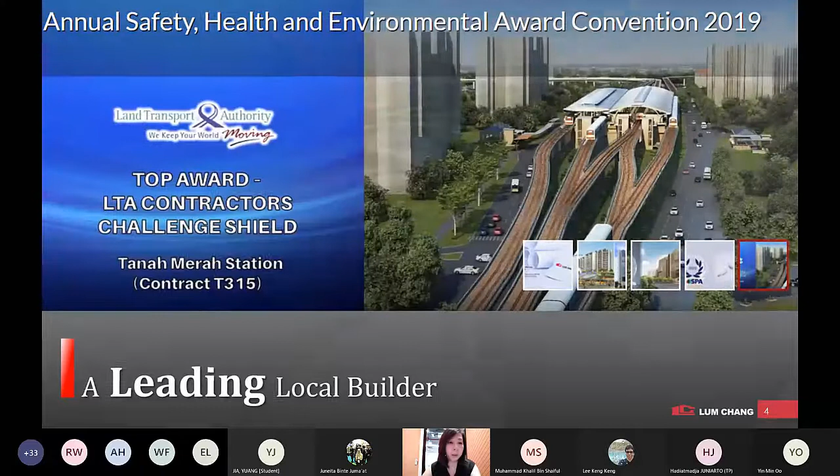So how did Lum Chang transform with the IDD adoption? Besides achieving technological capabilities, we were able to also improve our sustainability, our environmental health and safety, strengthen our competency in building projects, advance our capabilities in complex civil and infrastructure projects, and build capabilities for the workforce of the future.

Virtual Design and Construction, or VDC, is an integrated approach that combines the use of building information modeling, which is BIM, and advanced management methods to simulate the complexity of the construction project delivery.

So the value proposition is to understand the difficulties the project team is likely to encounter, to analyze these difficulties and address them in a virtual world before any of the construction work ever takes place in the real world.

So integrated digital delivery, which is IDD, aims to connect all the project stakeholders through digital information. Such shared information created through BIM VDC will allow the integration of the entire project delivery process from design, fabrication in factories, assembly on site, to operation and maintenance of building.

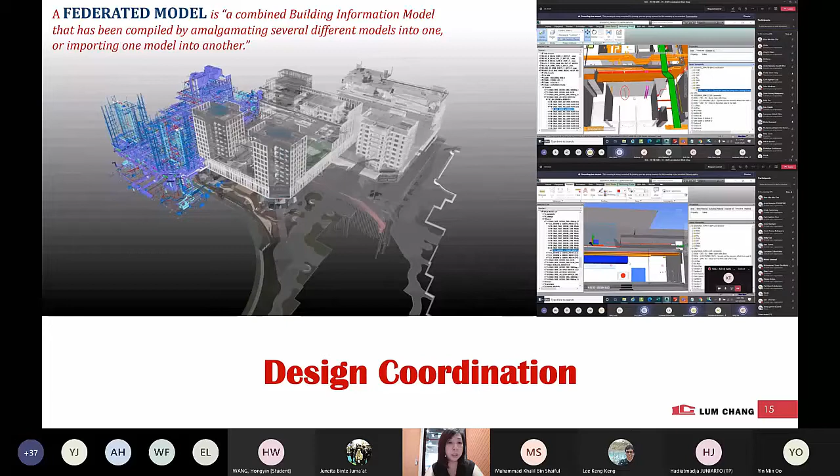In digital design, in cross-phase integration, the design BIM model is usually handed over to or procured by the main contractor upon award of contract for development of the design model to construction model. What you see here is a federated construction model with all the different disciplines for design coordination.

The next example shown here is the federated model of an infrastructure road tunnel project. Usually 3D modeling is only applied for permanent works. However, considering that a large part of this project interfaces with existing utilities, we decided to implement 3D modeling for the entire project, including all the temporary works for ERSS design and coordination.

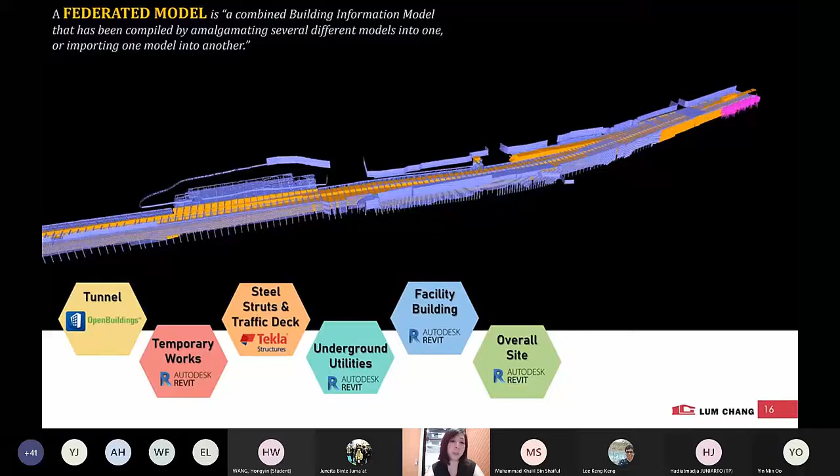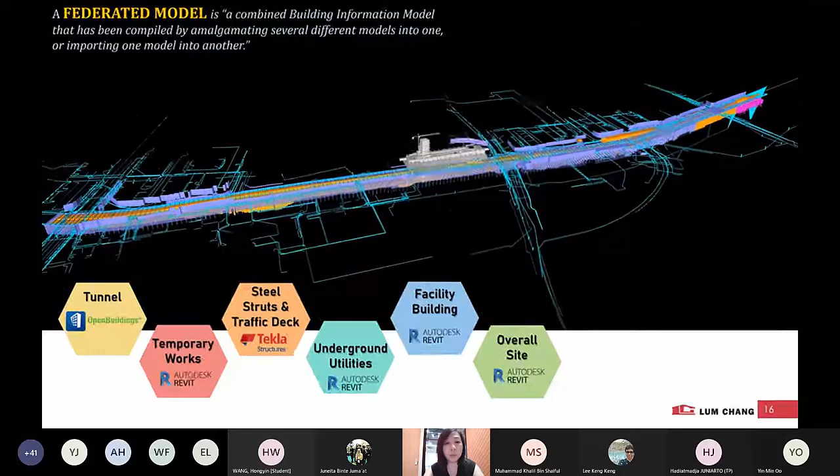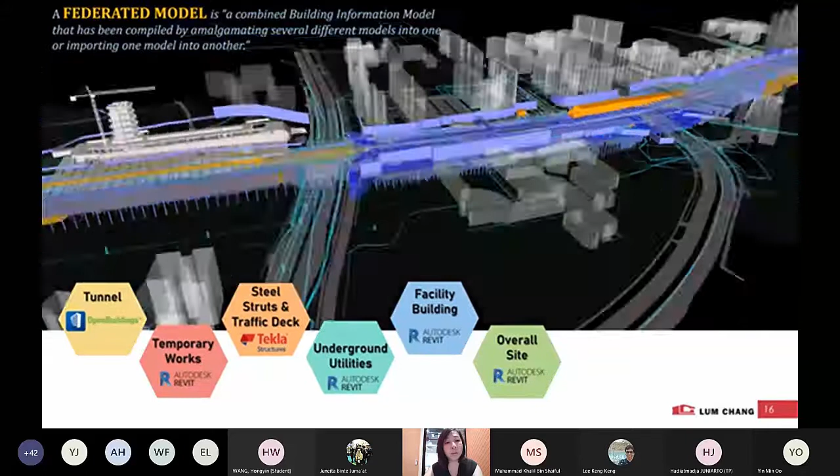Selecting the best software for its purpose, the 3D models were developed using multiple softwares to improve productivity, design analysis, and coordination. Computational BIM software such as Rhino was used and integrated with Bentley OpenBuildings to optimize the design and develop the alignment of the tunnel structure. Tekla was used for steel struts and traffic deck models, and the rest of the models were developed in Revit. The temporary works model was also used for generation of ERSS shop drawings.

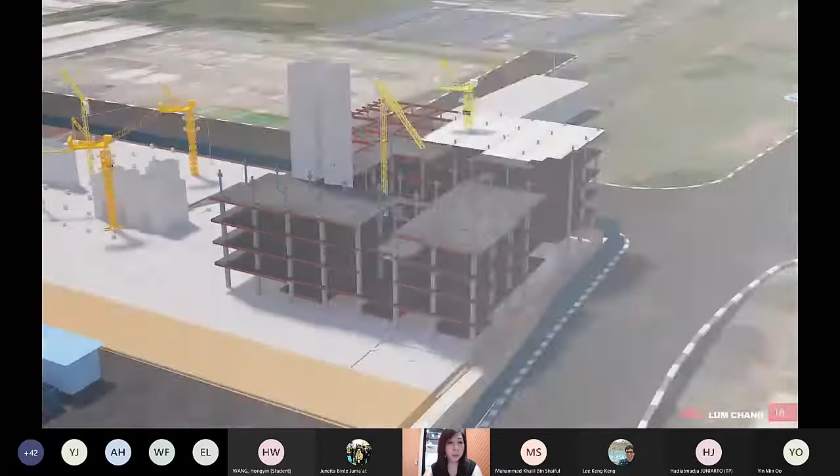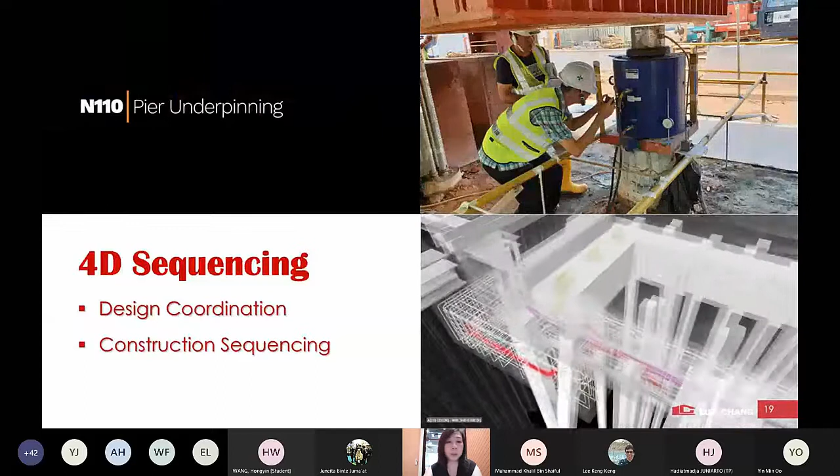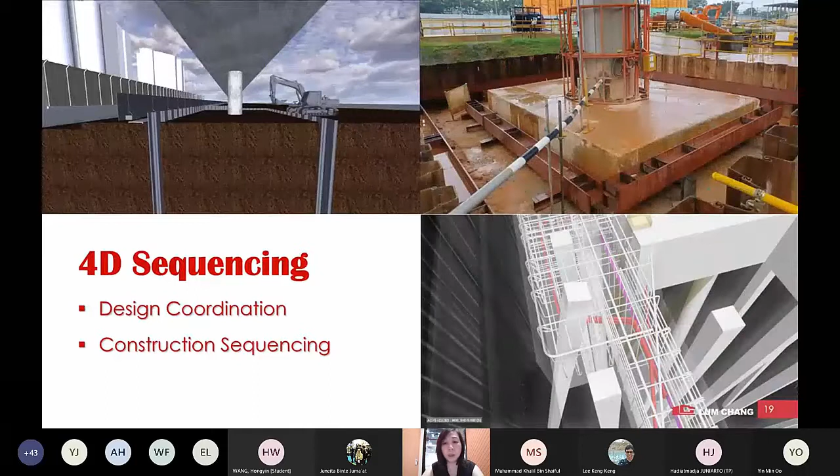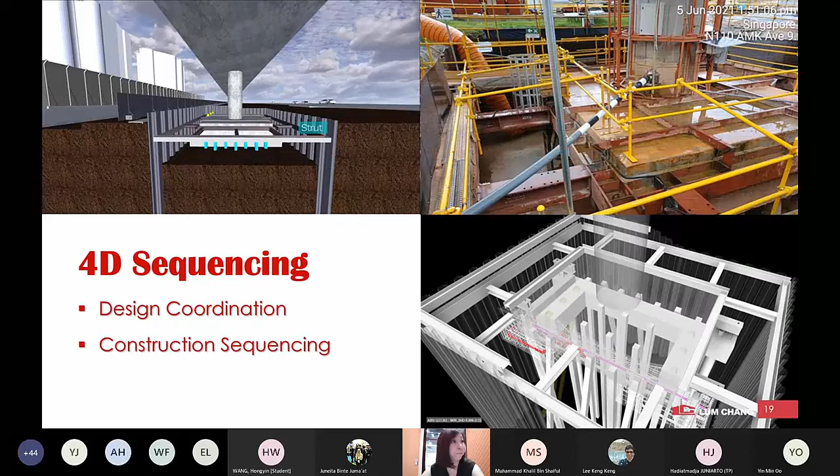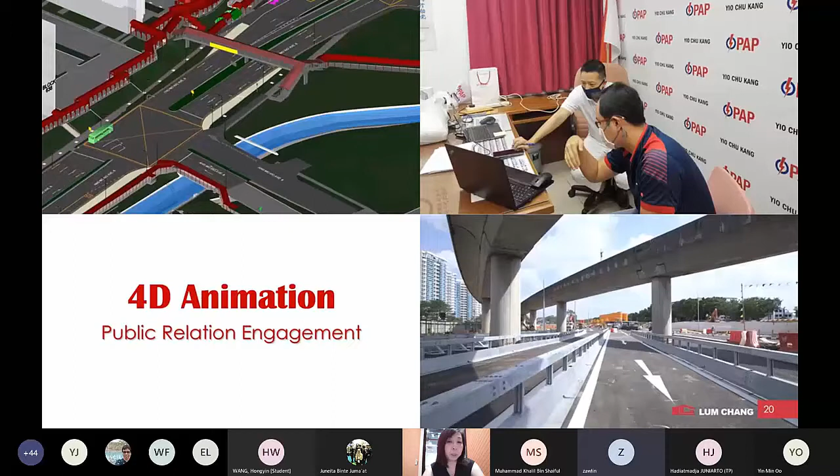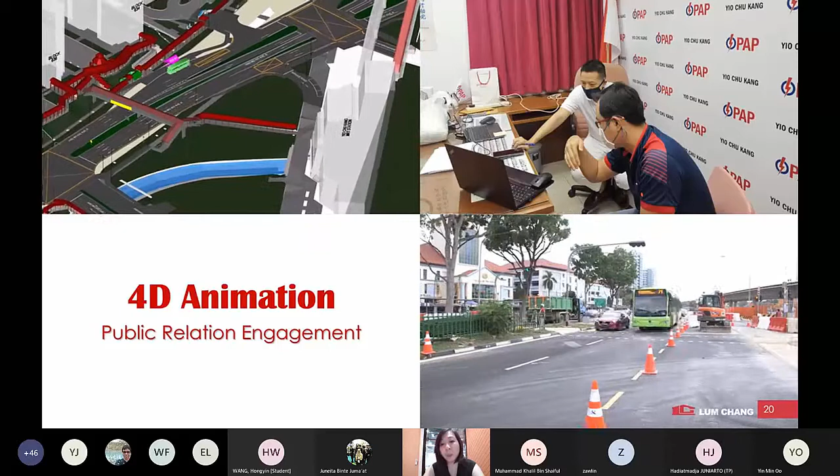For public works that affect the wider community, it is common for the contractor to brief the grassroots leader of the work site for their support on works that might potentially impact the daily life of residents within the community. The project team implemented 4D animation video to improve visualization of the critical upcoming works that require us to brief the stakeholders. The feedback from the stakeholders on this new technology was that it was very clear and easy to understand.

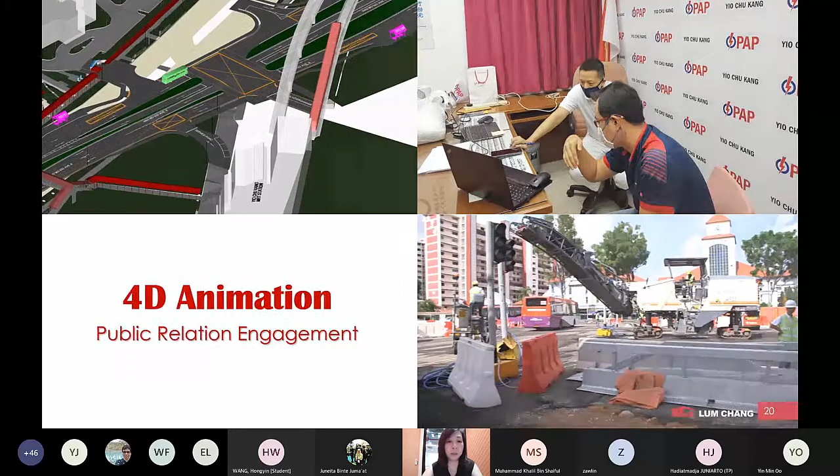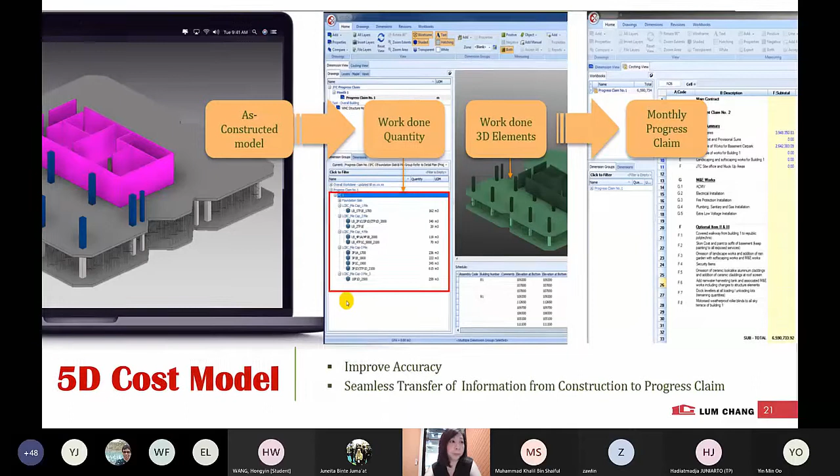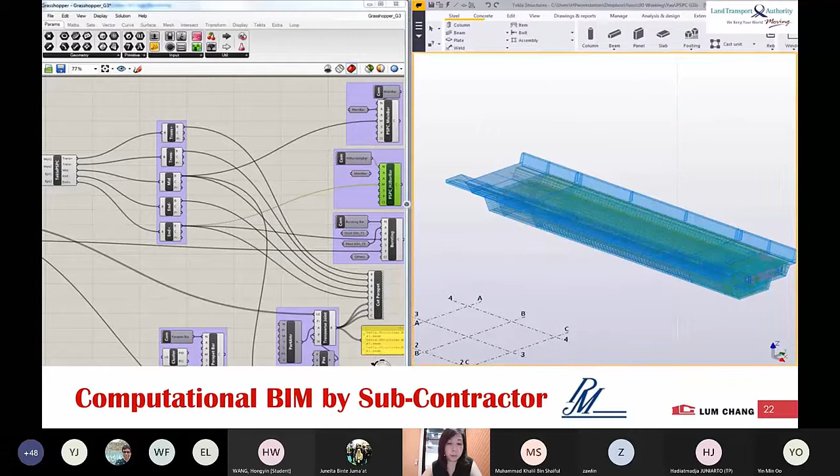In digital manufacturing and fabrication, the nature of precast concrete construction entails thorough pre-construction planning. As various aspects and phases of a project are interrelated, success depends largely on how effective the linkage is between each construction phase during implementation. Construction sequence, production scheduling, and resources are therefore important and need to be closely monitored to avoid costly delays in site progress. Trimble Connect system utilizes a 3D precast model imported into their system to identify and track the status of each precast component.

Using either the barcode or QR code at 5 stages: first is casting, second quality control, third leaving the factory, fourth arriving on site, and fifth installation. Each time a precast component completes one of the stages, the barcode or QR code of the component will be scanned and the status updated in real time on the 3D model in Trimble Connect system. This allows the project team to track the precast component progress in real time from their desk.

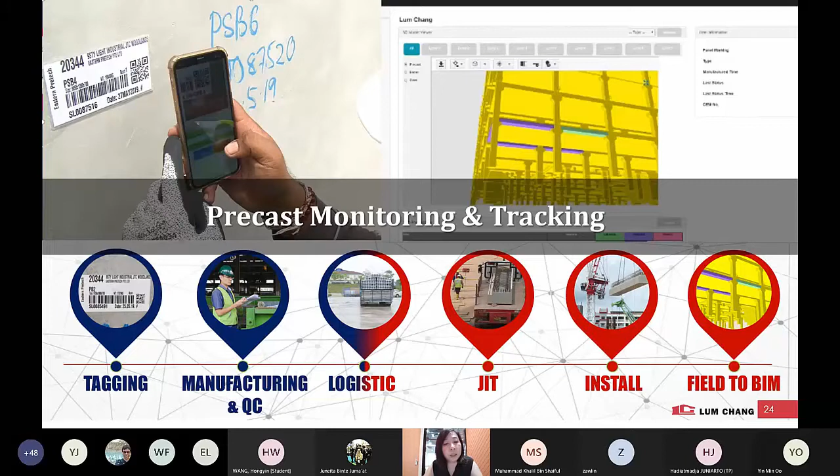Similarly, a defective component that is rejected will also be scanned and updated in the system in real time so that the factory realizes it immediately. Next is actually a video of the whole process that I've just explained.

So it starts with tagging. In the precast factory, they will use the 3D model and generate the detailed drawings, create a unique ID, and have it printed out.

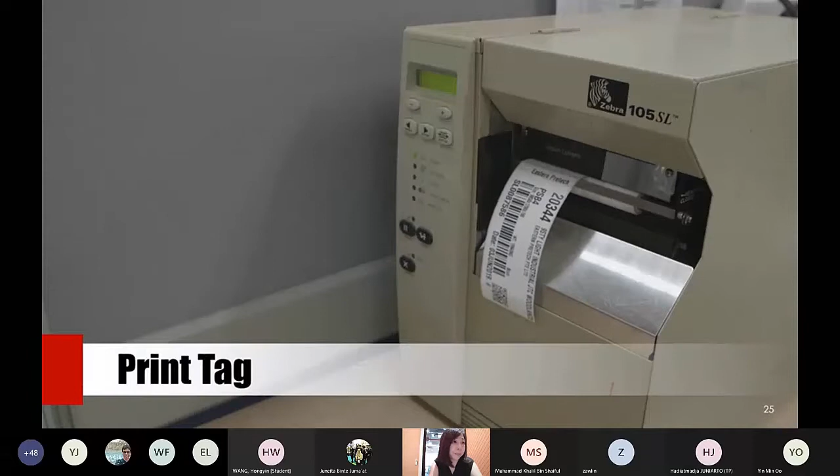Next is the manufacturing and quality control. So our team will be on site to do inspection, periodic inspection.

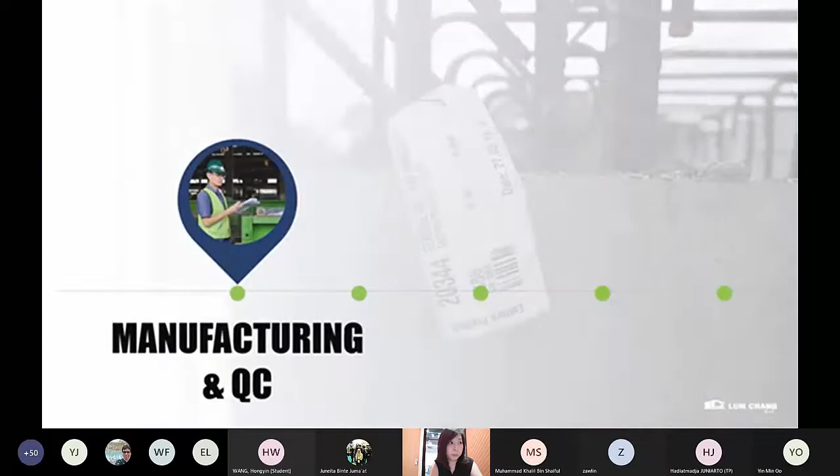This is the tagging that's ready for delivery. So they'll scan it with the barcode.

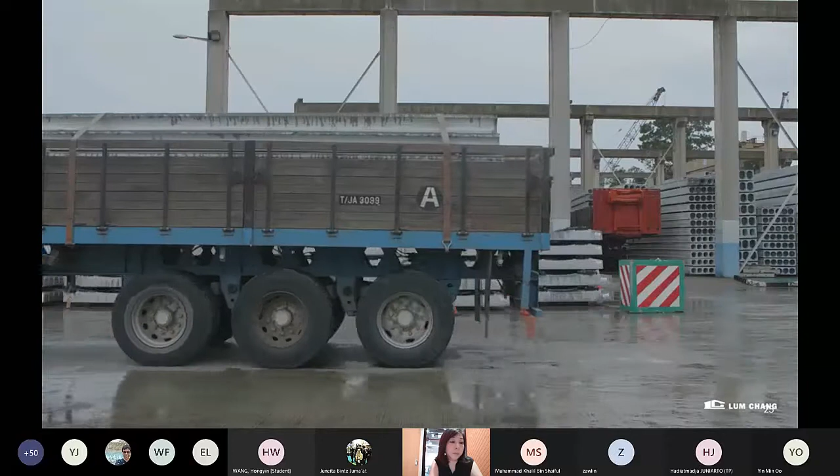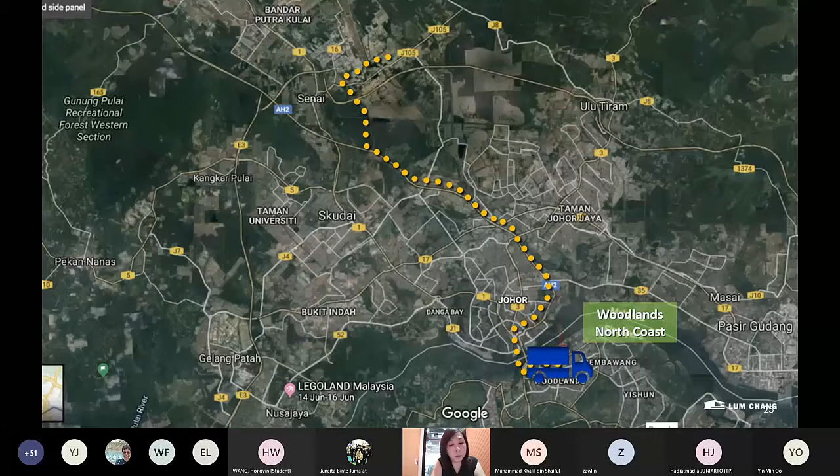Coming from Malaysia, the reason why we had both barcode and QR code is because in Malaysia they use the barcode, whereas in Singapore we prefer to use our QR code. So we have both integrated into the tag.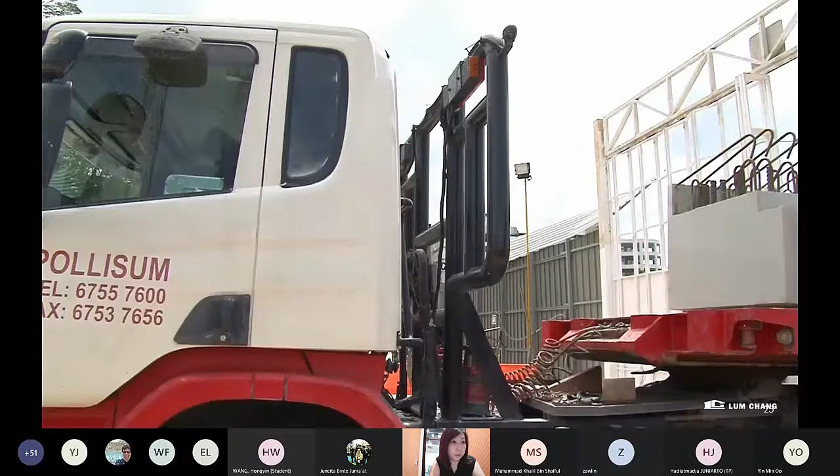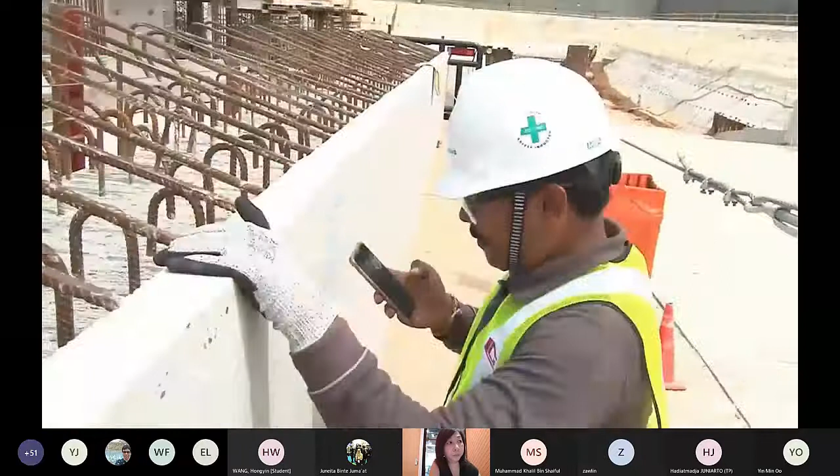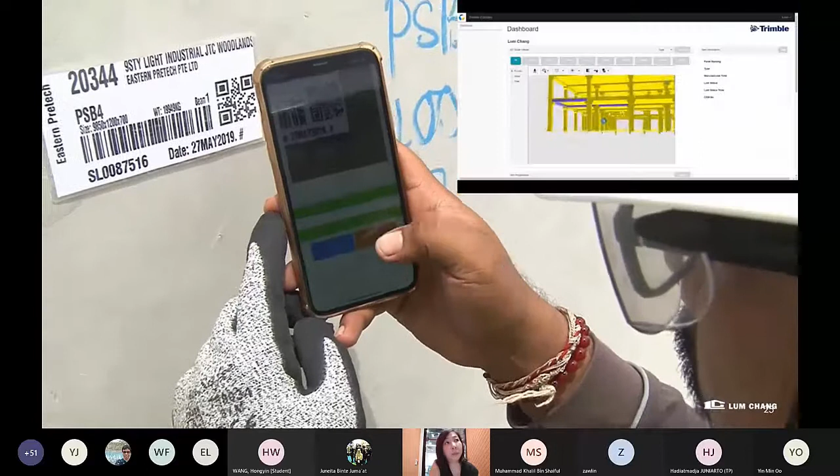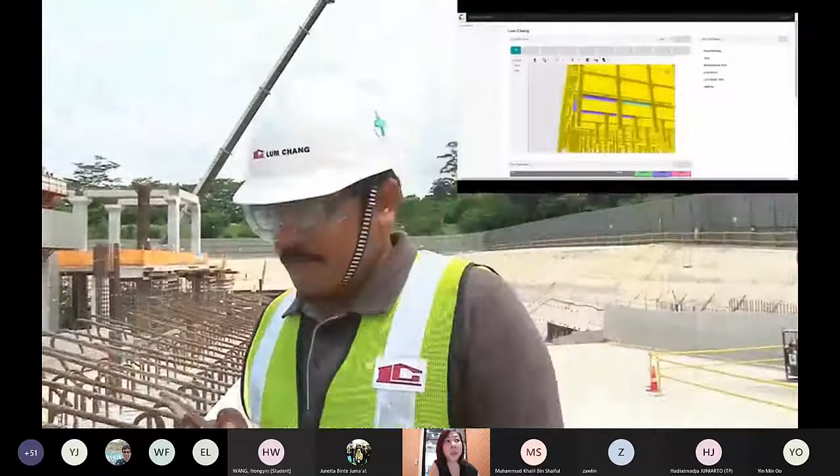So once it's arrived, it'll be scanned. And you can see from the top right hand corner, it will change in real time when the item is scanned. It will change to a different color that says it has been delivered, which is in green.

As we look into improving productivity during construction, the use of prefabricated bathroom units, or PBU, when possible, is a good option. We have completed a mixed development project in which we used Singapore fabricated PBU. The design timeline took approximately 7 to 8 months, including studying and coordinating with the fabricator.

It is a 5-sided PBU with the size 2.2 meters by 1.8 meters wide and 2.725 meters height. The height of the PBUs was critical as it affected the delivery.

You can see in the table here, we have the 2.725 meter PBU plus 650 mm M&E services below, plus a 1.05 meter low bed delivery vehicle. The overall transport height for the PBU is now 4.450 meters, which is 50 mm below the allowable height of 4.5 meters for public road. Hence, M&E services had to be compressed within the 650 mm.

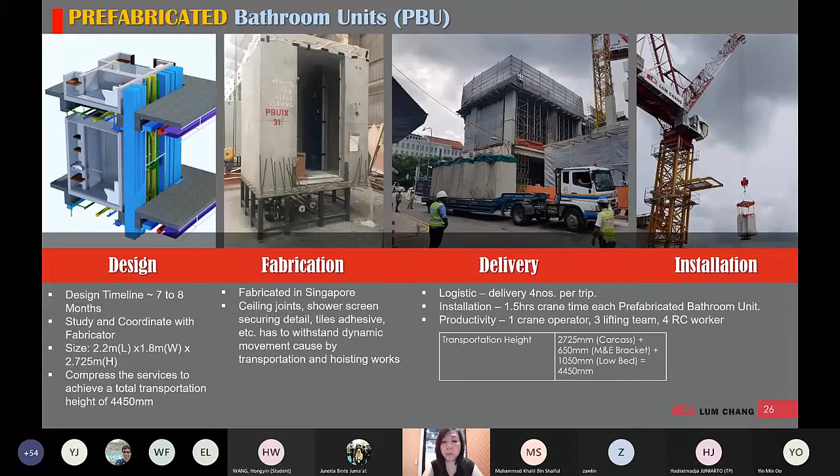Also, when studying the design, we had to take into consideration the details of the finishing, as it has to withstand dynamic movement caused by transportation and hoisting work.

For Design for Manufacturing and Assembly, or DFMA, for mechanical and electrical works, we utilized this as one of our light industrial projects for all the M&E services running along the corridor. The design timeline with the specialist took about 4 months, and each M&E module was 6 meters length by 1 meter width and 2 meters height.

The benefits are better quality, safety, and improved productivity, as traditionally each trade had to be installed individually. With the module system, all the coordination is done upfront, and abortive work is reduced.

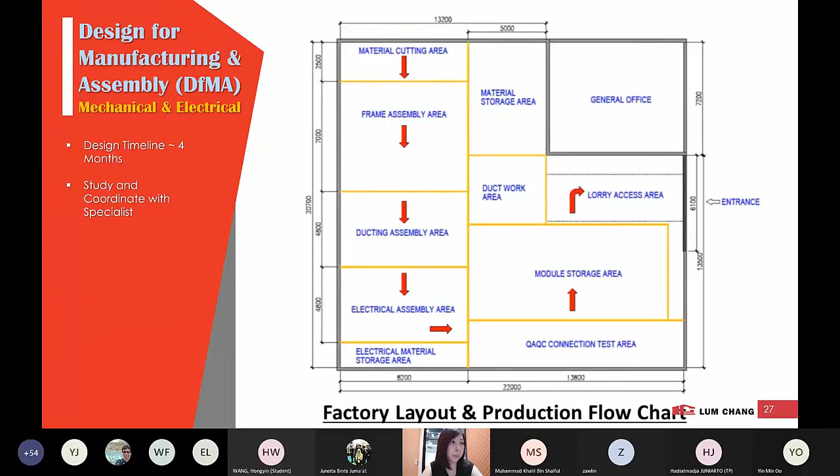This video will take you from fabrication to installation. In the offsite factory, you have a factory layout that shows the production workflow, the production office area, material storage, and how they do the material cutting and setting up of the main frame.

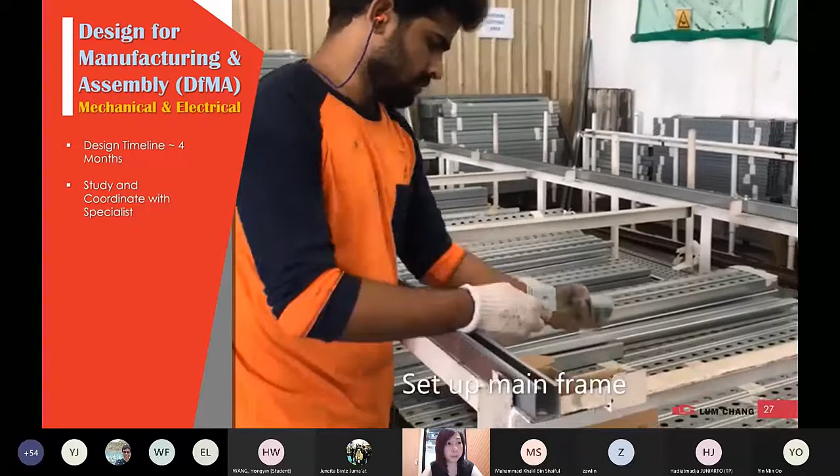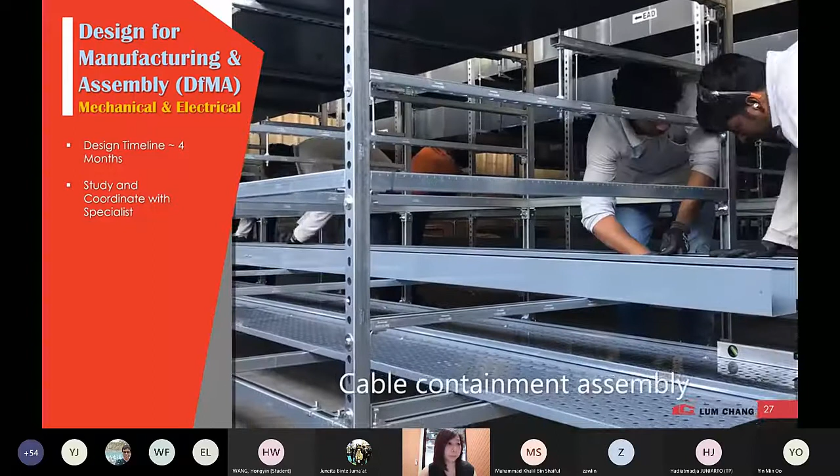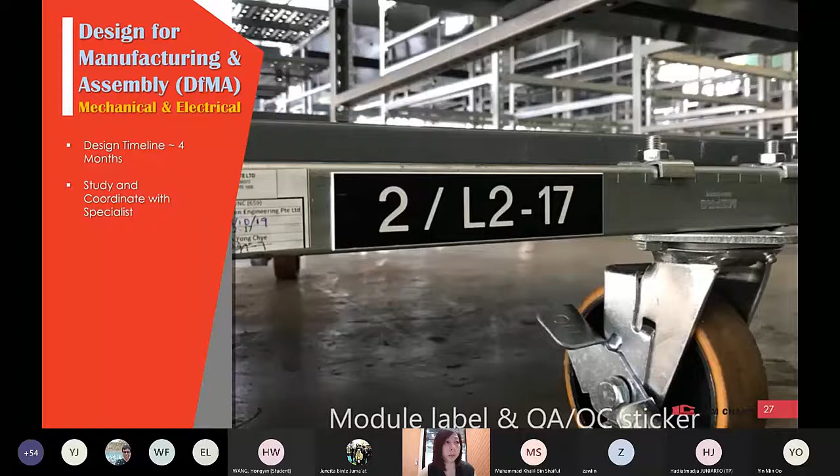After that, they will have quality control checks, after which this module is loaded and transported to site for installation.

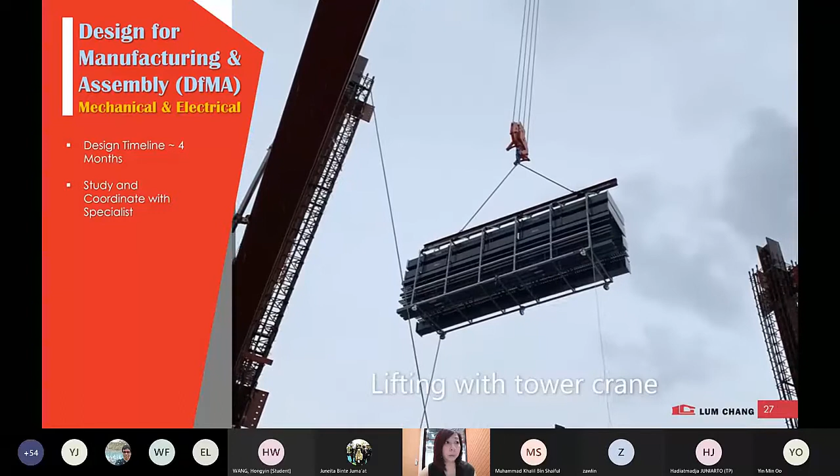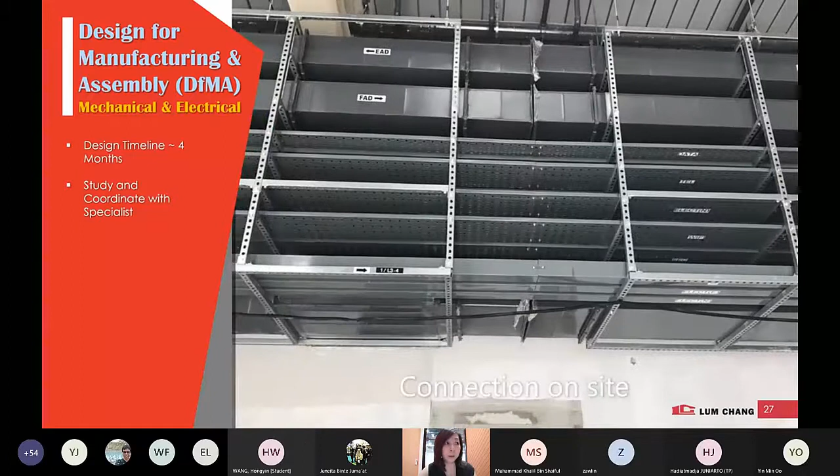Due to the size, it will be lifted, and using a scissors lift, we will actually install the module, and then they will be connected on site. This actually gives us a lot more productivity.

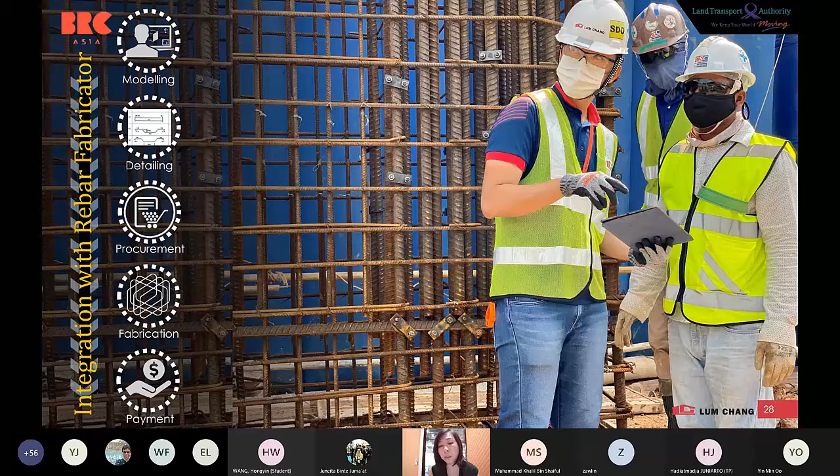For rebar fabrication, we have established a full process of rebar modeling, rebar shop drawing production, and extracting the BBS, or bar bending schedule, from the Revit model, then procuring the rebar from the fabricator based on this rebar BBS. Using the Revit template from the rebar fabricator BRC, errors are checked as we model the rebar. Errors are checked and resolved within Revit so that the exported BBS is free of errors and can be imported directly into CNC for fabrication. This integration and direct process improves our overall rebar documentation and productivity in rebar procurement.

To improve the steel structure construction methodology for steel buildings, we use cast-in nuts in columns for connecting structural steel beams to RC columns and core walls. This accurate positioning of the cast-in nuts is possible with the use of a 3D model. Correspondingly, the safety team also uses the 3D model to visualize and identify steel beams that require temporary steel safety barricades. These barricades are designed in the 3D model and fabricated together with the steel beam, which improves productivity in temporary steel barricade installation.

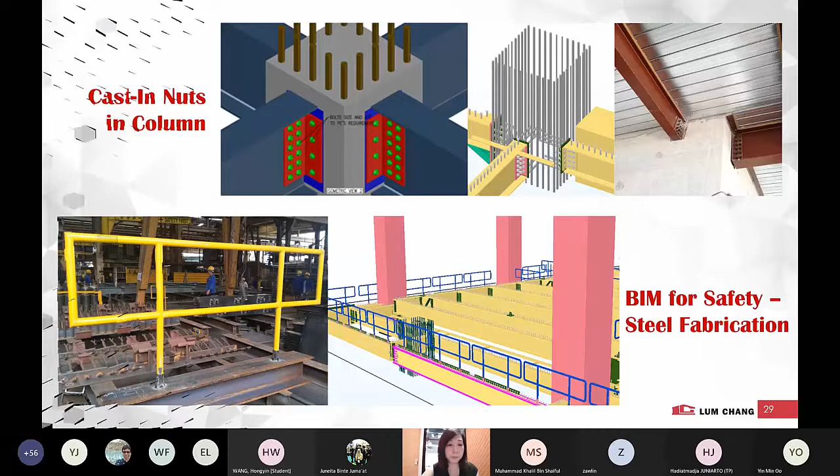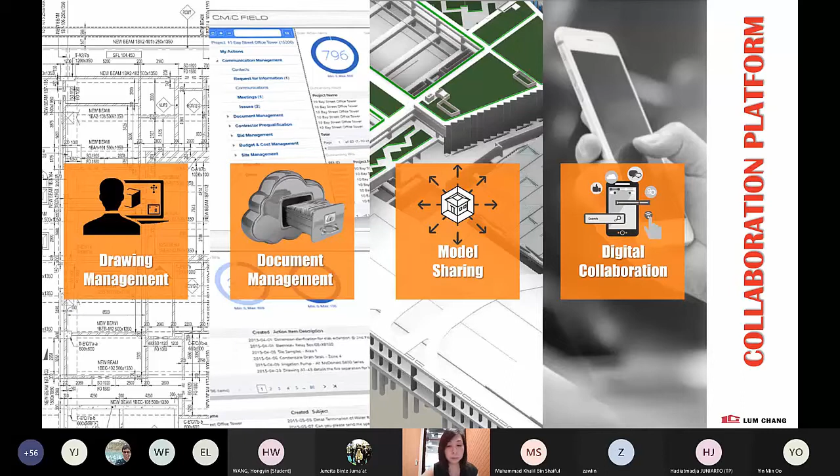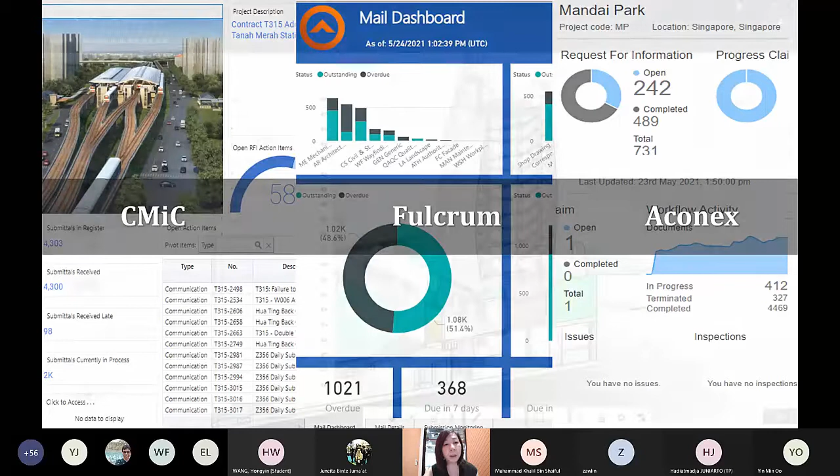In digital construction, the project collaboration platform provided a secure and robust cloud-based communication platform between project users. It improves and enables traceability, compliance, and standardizes the documentation management for the entire project lifecycle. The platform covers drawing management, document management, model sharing, and digital collaboration. Full integration within the project value chain is achieved using such a collaboration platform. These are three collaboration platforms that we have used to date. We also have a collaboration platform for models and a safety platform.

Supporting BIM-to-field communication and visualization on site, the collaboration platform also allowed the project team the ability to view 2D or 3D models without the need for native software, on a tablet. This enabled the project team to bring real-time digital data on site for inspection. This also improves our sustainability as the need for printing drawings is no longer required.

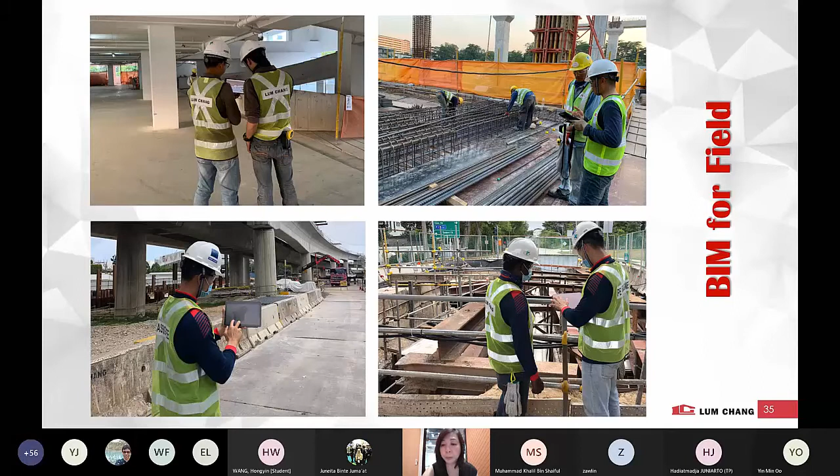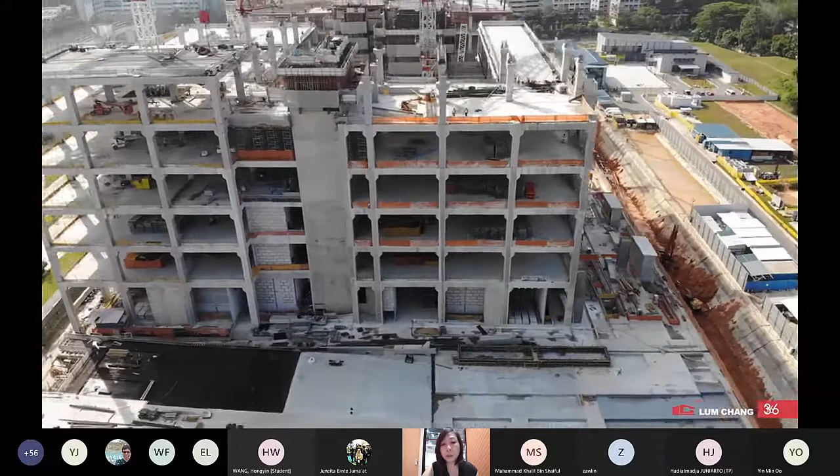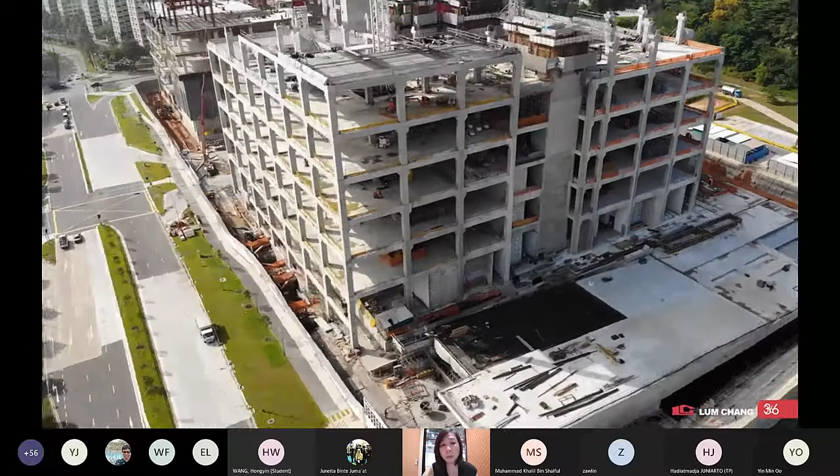With weekly drone flights, the project team were able to obtain and review aerial view photos and videos of the site progress in the office. Using the same weekly drone footage, the safety team was able to review the project from a bird's eye view and identify concerns that would be impossible to see at ground level inspection. This also improves our risk management significantly.

We also implemented virtual reality safety training for the project workers. This technology is not meant to replace conventional hands-on training or instruction by an in-person trainer, but rather was commissioned as a beneficial tool to supplement traditional forms of training. This VR safety training provided opportunities for workers to practice safety procedures and processes in a familiar environment through immersive technology.

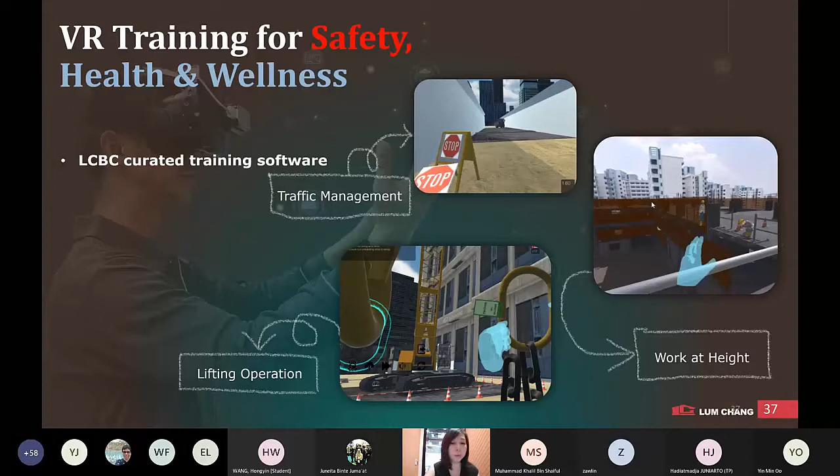For example, we commissioned an external vendor to produce four interactive scenarios similar to real life situations: traffic management, lifting operation, work at height, and healthy living.

The immersive training included simulating the way personal protective equipment works and how it should be used. Complex situations and processes were also created through VR, allowing the workers to practice in a simulated environment. For example, workers were able to practice lifting work or work at height without risk of injury. Additionally, the VR provided an opportunity to enhance training, adding value to the employee's experience and improving an employer's ability to reinforce key safety points.

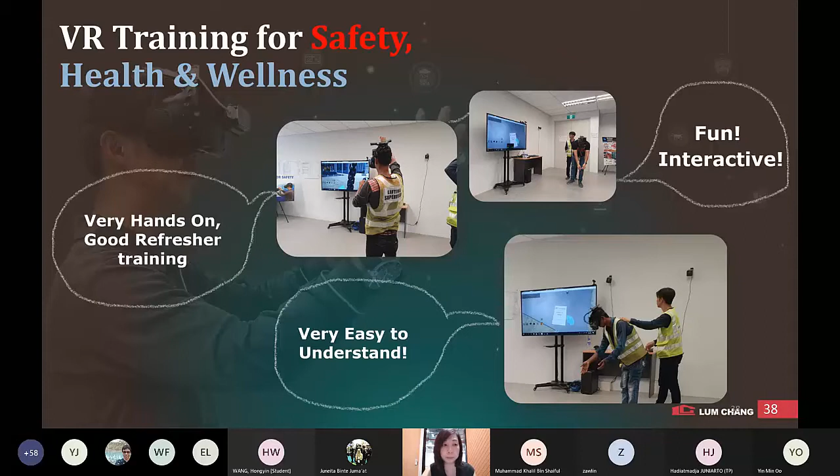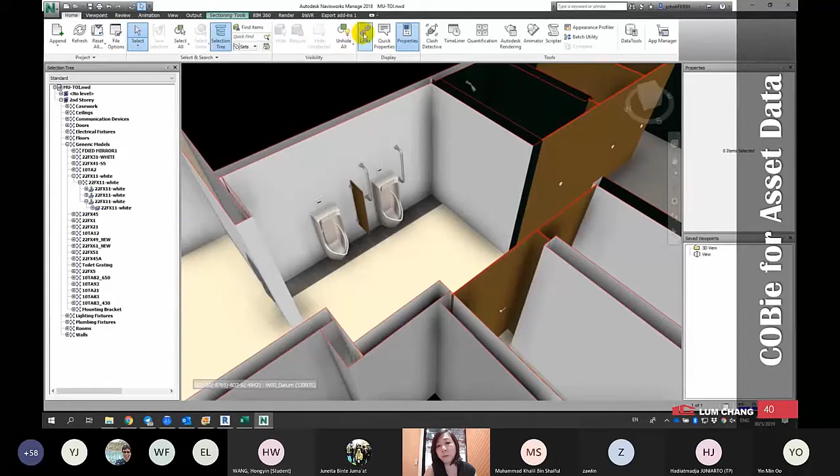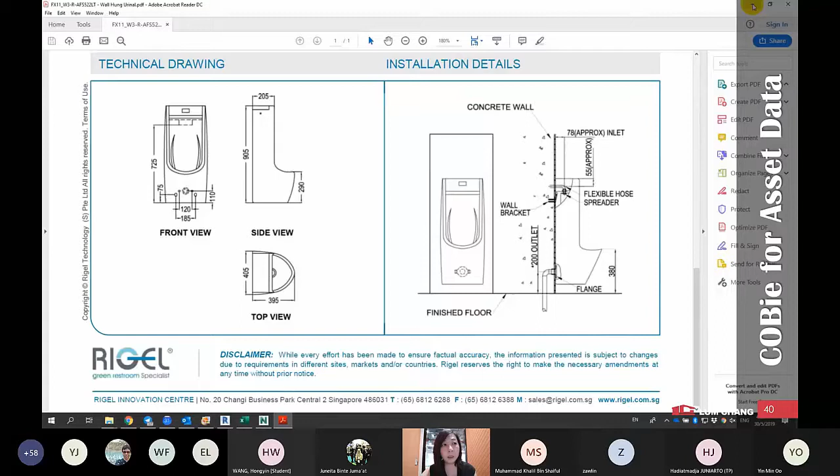In digital asset delivery, to provide useful information about the building for future maintenance or retrofitting, we utilize COBie for asset data input. This relevant information exported from Revit can also be populated into various facility management systems. What you see here is a Navisworks model that is linked and embedded with all this information. By clicking on the link, it will pull out all the documentation.

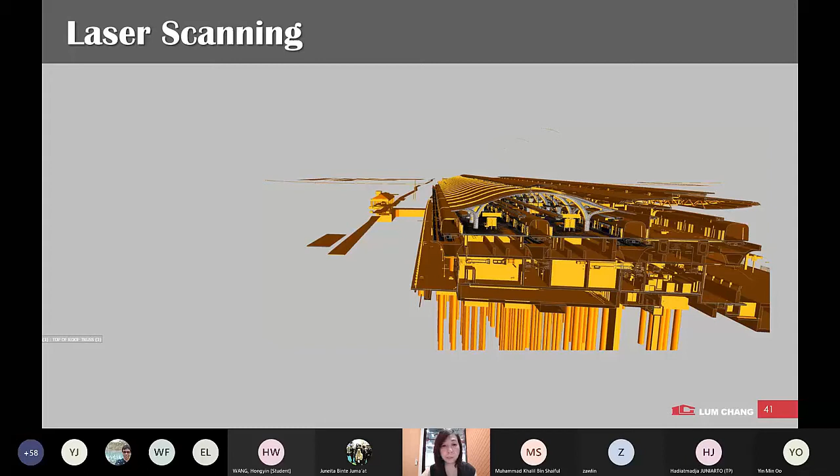Using the 3D model, the robotic total station allows us to verify the virtual and the actual geo coordinates of the constructed work, especially when we had a lot of SBP for one of our infrastructure projects. We use Dynamo to extract all the geo references and check them with our robotic total station on site.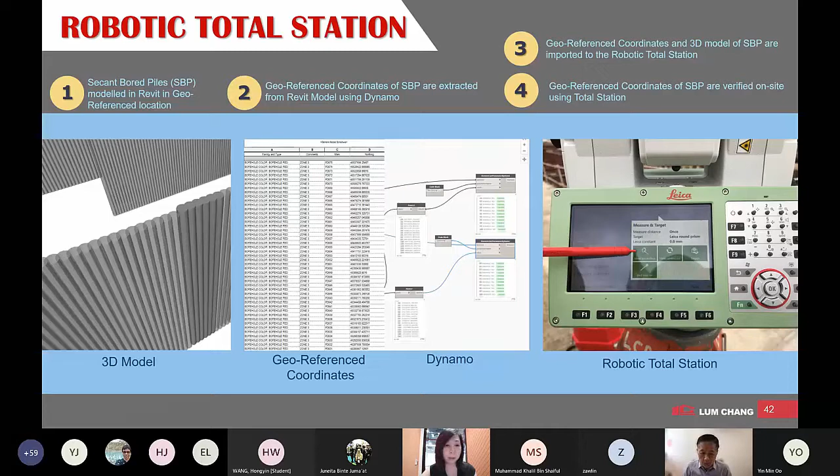So in summary, as we work towards digital transformation, there are a lot of different software, tools, and technologies available. The important part is to know which is best for your project. Only by selecting the most appropriate software, tool, or technology will you be able to increase your productivity and improve your sustainability.